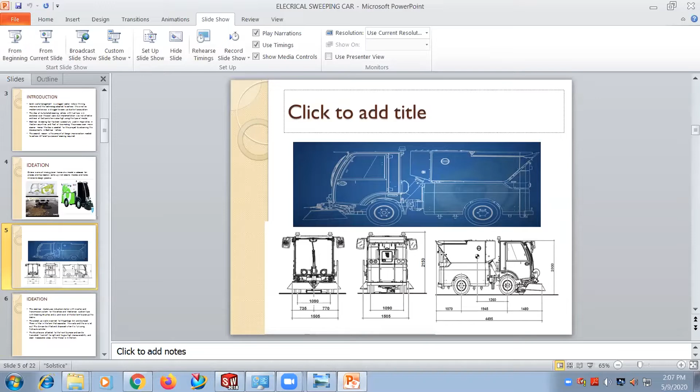Basically, the working model has two vertical sweeping units and a vacuum roller, which is attached at the bottom of the front part. These are used to pick up the ground waste, done by a mechanical suction unit, and it will be dumped into the bin, which can later be skipped for main garbage.

So these are the parts that are designed: chassis, electric unit, battery module, etc. Mainly it can be classified into 5 components based on purpose: chassis and wheel, electric unit, front cabin, sweeping unit, and rear cabin.

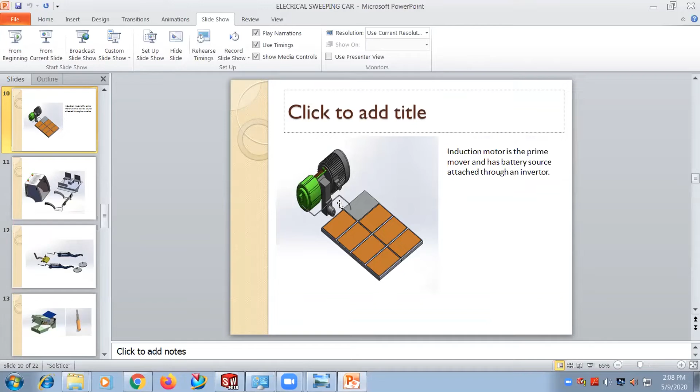In the presentation below, I'm just showing images and will explain further in the SolidWorks model. So this is the wheel assembly, and this is the battery module. The idea behind this is to give more vehicle stability. This is the electric motor, and this is the inverter that is used to convert the DC power of the battery and supply it to the AC induction motor.

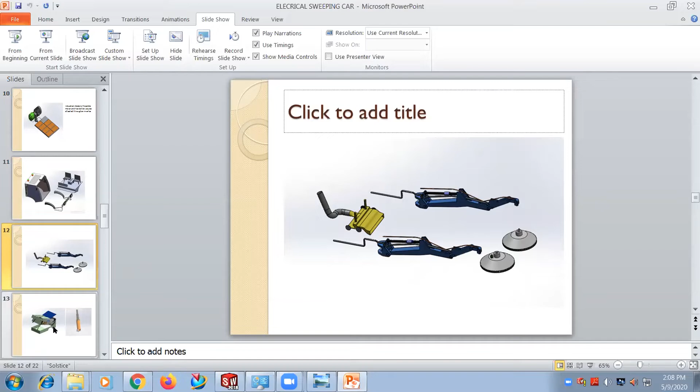This is the cabin, which has the frame, cabin structure, and interior cabin design. These are the sweeping units, which have two front arm sweeping and vacuum rollers, and two rotating sweepers. This is the cabin and the hydraulic cylinder.

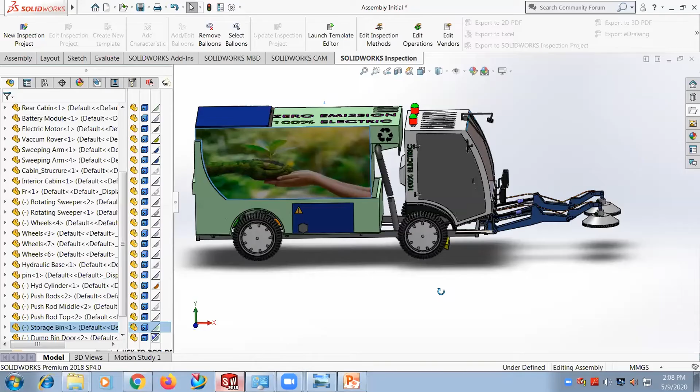So this is the model done in SolidWorks. As I mentioned, there are 5 different components, and I will show you.

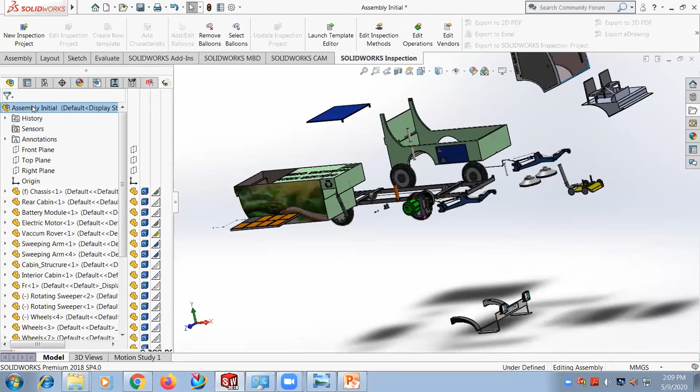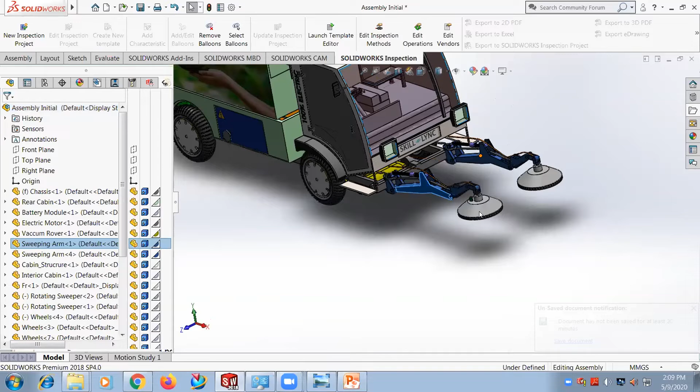The main idea behind this: this is the cleaning unit, which has a vacuum roller and two vertical sweeping arms. This can be moved horizontally, fixed between two sides, and it has this rotating sweeper that picks up the waste.

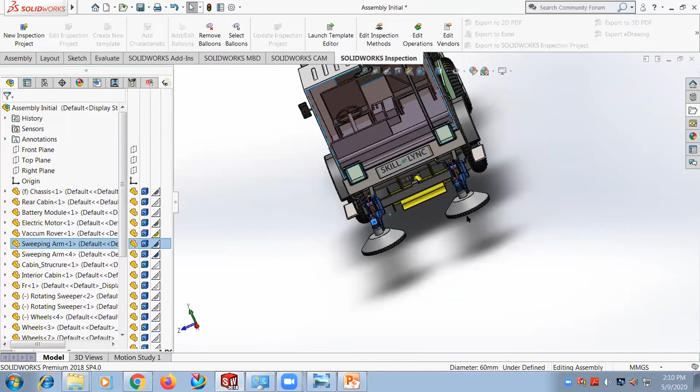This is the vacuum roller. The main idea to design it like this is to give maximum maneuverability to access different areas while doing the cleaning process, and whatever waste is left in the middle will be picked up by this vacuum roller.

The front cabin is designed to give maximum viewpoint for the driver, hence it has a very open front window.

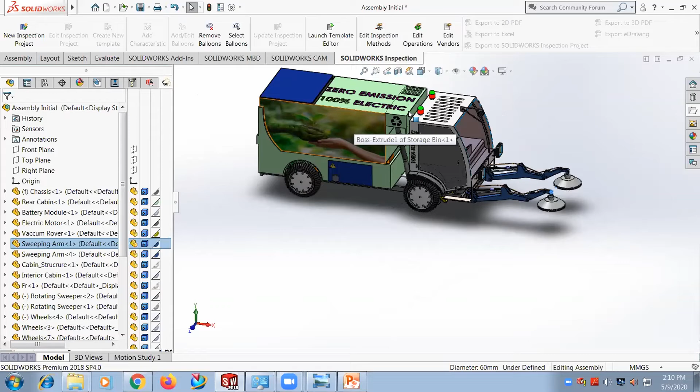This is the rear cabin, which is a dump bin, and it has a mechanical suction unit at the top. The waste which is picked up is carried through this pipe and dumped into the bin, and the air that is filtered will be exhausted through these vents.

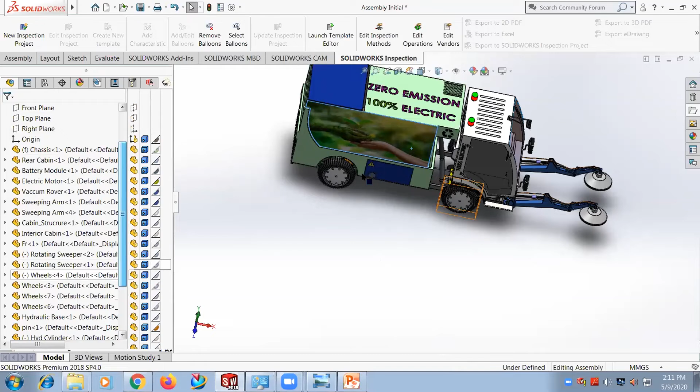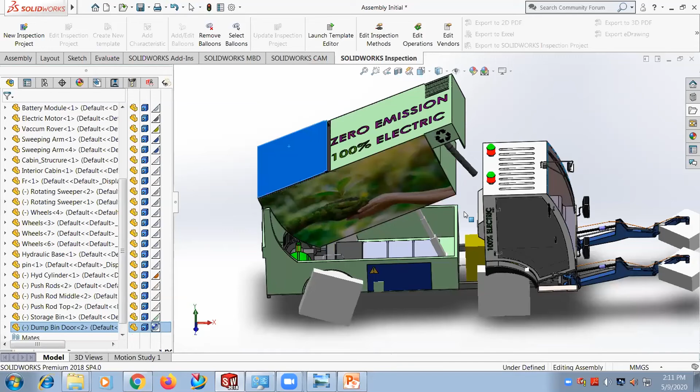Basically these are individual battery components, arranged in series and parallel. All these are individual units, so whenever required, it can be replaced. That is the idea behind it.

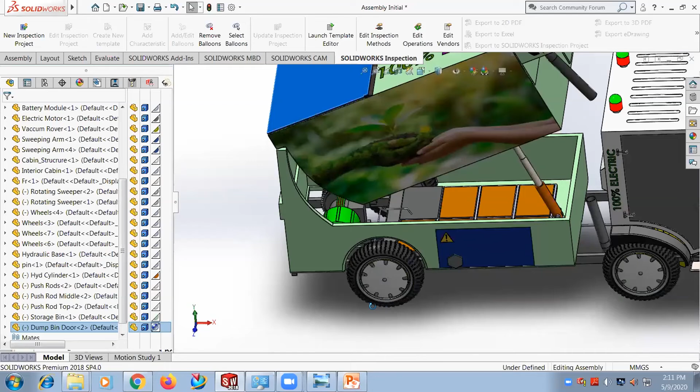Also, to give a good vehicle structure, I've made it flat, because as we know, in creating electric vehicles it will reduce a drastic amount of parts, and the total weight of the vehicle will reduce. That's why I made it horizontal.

Based on this, after the assembly, I've done rendering. I've used two different environments, which I will show in pictures. This is one environment that I've done using basic camera settings. I've added two different cameras and used PhotoView 360 to render these images.

This is the working model. I've just shown how it will look, and this is the working model. I've also added decals on the faces to give a more realistic appearance.

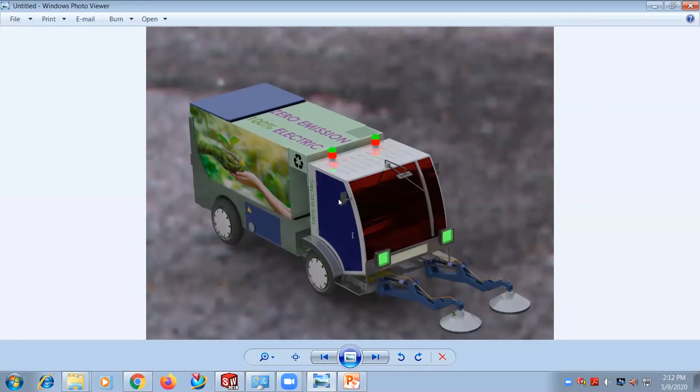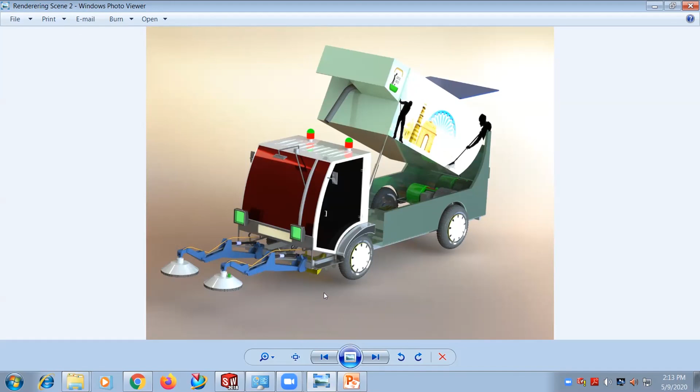The future scope of the project will be providing more tubing, and also this particular unit I've just made as a single part, because it would add more complexity in doing assembly and design, so that's why I made it a single unit. In future this can be broken into individual components and assembled so it can have various types of motion, so this arm can be tilted at any angle to pick up the waste.

So that's it, and thank you.